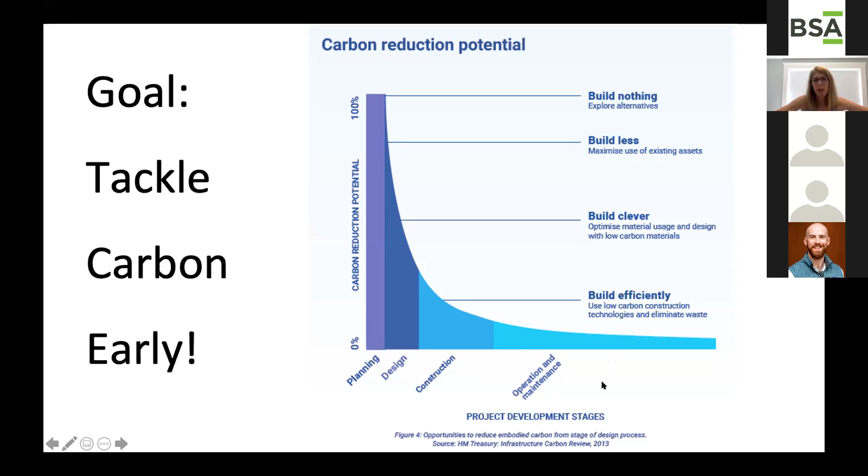The Carbon Leadership Forum is really an amazing repository of information for everyone, from the novice on the topic to those who are looking for data sets to assess their own work.

To optimize the project, there's a lot the design team can do here. You have a new building versus a retrofit, a smaller footprint, program efficiency, designing spaces that can be used for multiple purposes instead of designing more square footage for unique spaces.

When we get into the optimized system, this is where I think those who are involved in procurement, especially for new construction and renovation projects, really can have a hand in the matter. That's where we start thinking about alternate materials. Builders are experts in materials, and because you install them and have to deconstruct and reinstall, you have access to a lot of information.

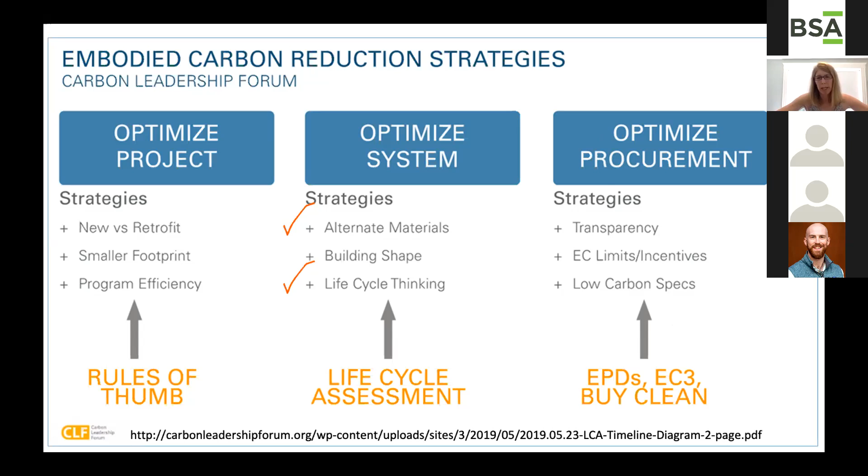And finally, we have optimized procurement. This is something that I think all of our speakers, but especially Stacy, will be delving into deeply, so I'm not going to say anything more.

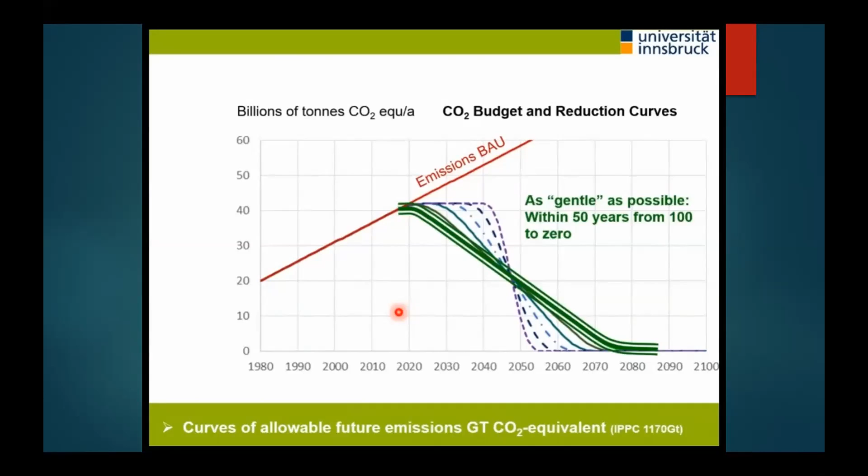The second graphic here shows the business as usual, so the BAU versus the glide path scenario, if you will. You can see in this space of complacency, there is a lot of work to be done to bring things down to where we need to be.

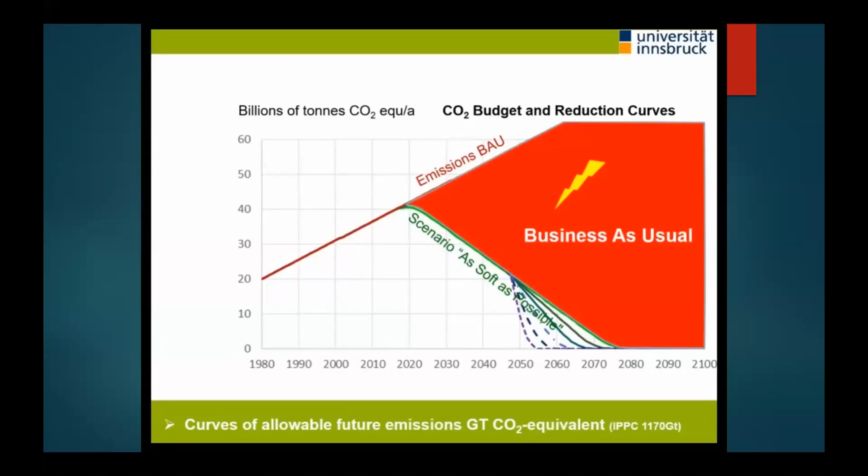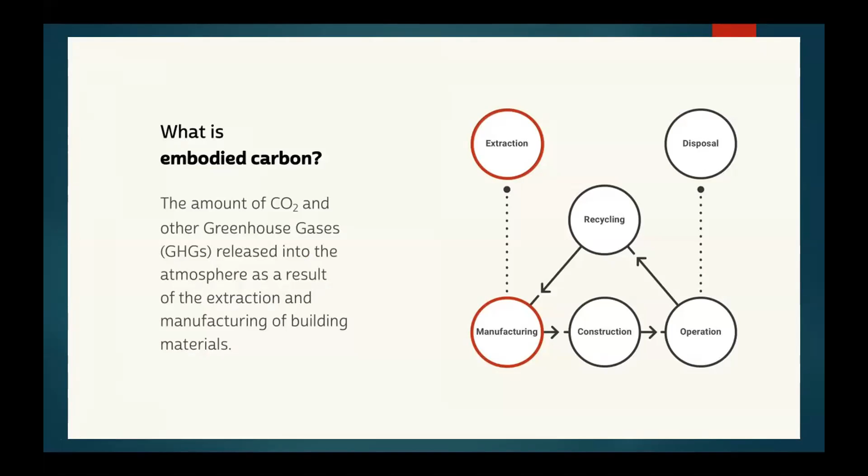Straight away, I would like to underscore the importance of the role recycling and waste reduction plays in the carbon cycle. Very important. It can function to keep embodied carbon in service use, avoiding disposal where the carbon is ultimately released.

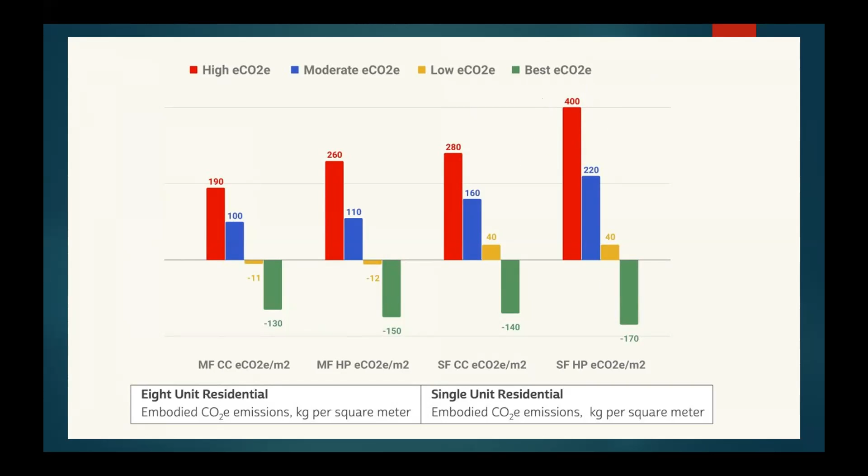So how do we procure? Big question. And while I certainly don't have all the answers, I have a lot to learn and understand. Hopefully I can impart a few helpful points to move forward with: transition from business as usual to the best of your ability, and find ways to continue to improve over time.

This is not an easy task. We've found that we really need to motivate ourselves and each other in the absence of energy and building codes that do not adequately account for upfront carbon values. While incremental improvements are certainly being made, I believe the onus is upon industry leaders to engage a targeted process to integrate embodied carbon specifications into our projects ahead of those future improved energy and building codes.

And in such a way that we create a market with more available low carbon materials. Understanding the need to transition embodied carbon awareness and accounting from a concept or an ideal to an actual practice is critically important.

An example of something we can do to get started right now without calculating anything is to touch back with recycling and reduction of waste, substitute plant-based materials for synthetics, use FSC wood products, reduce building size, and one that I believe is a great starter is to get into the habit of obtaining EPDs, environmental product declaration documents, for all the products you use. If you have favorite materials that don't have an EPD, contact your manufacturers or providers to get those documents so we can amass our database with this information.

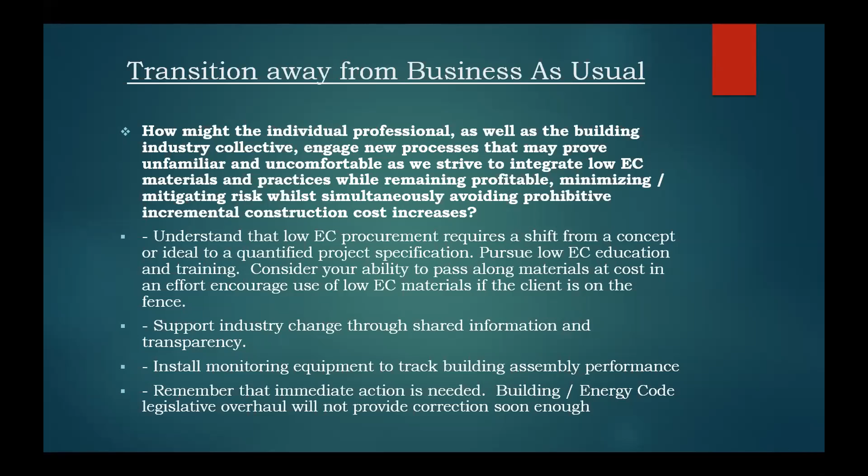Integrated design and development is an invaluable approach toward low embodied carbon construction success, and it's always better to have folks involved from the beginning for obvious reasons. But how we achieve our energy goals matters. It really does. A continued focus on operational energy is required, but we'll be missing a meaningful opportunity if we do not bring upfront carbon accounting and drawdown goals into our design and construction approaches.

Integrated design really enhances clarity and understanding, which inputs directly to project efficiency and cost containment. For example, it is very easy in high performance to oversize space conditioning and ventilation, and very easy to make subcontractors intimidated with new methodologies they're not used to. When you have intimidation or a lack of understanding, you have a perceived liability, and when you have perceived liability, you get elevated bids.

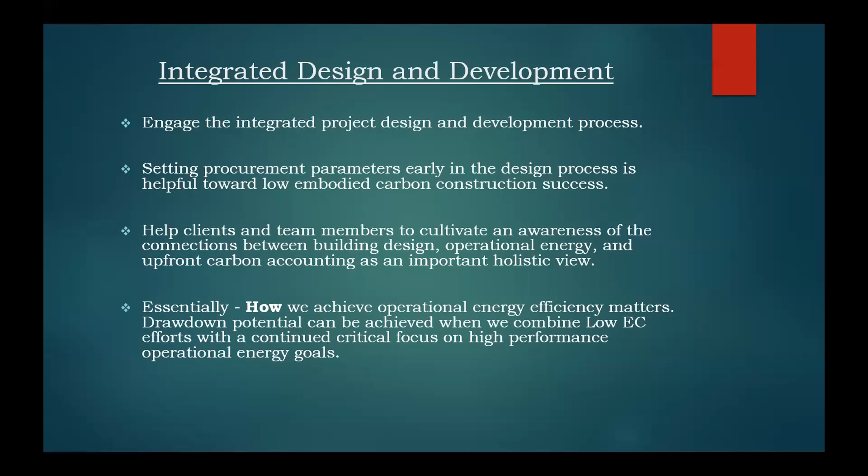So I really believe the extra upfront work in integrated design and development will pay dividends in making these projects possible down the road at affordable cost. Set up achievable goals early to promote this transition away from business as usual - it's a huge step in the right direction. Here are a few prompts to consider. In the interest of time, I'm not going to go through them all, but you can always refer back to this if you're so inclined.

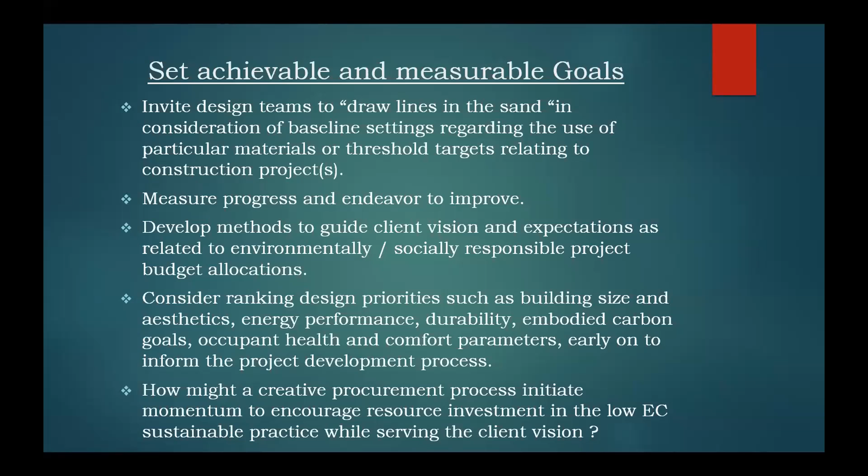While there are many ways to approach and present this, I'd like to underscore the importance of unpacking and truly understanding the actual value-to-cost ratio when comparing these assemblies. We've also found that if you break it down that far and it's all out on the table, it's a great segue to have those meaningful education discussions and debates towards figuring out what is what and why. So many times the important part is why, and once people understand, they're more inclined to move forward doing those right things.

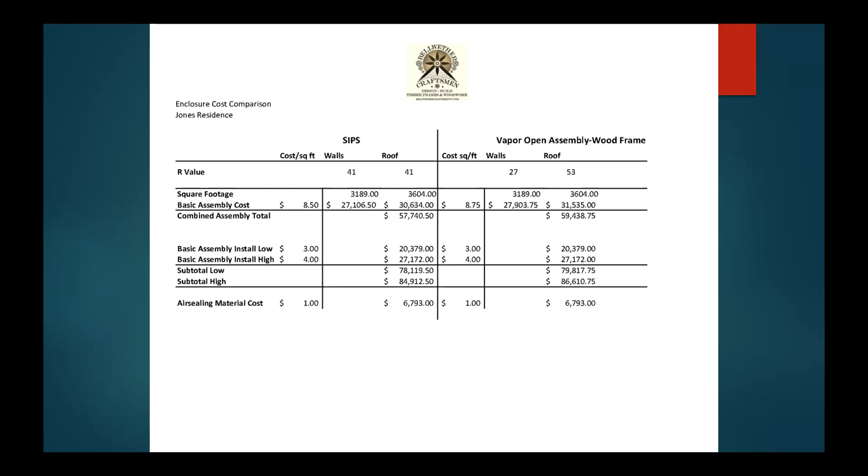Here we can see a cost analysis of that project, and you can see that we were very close. You can also recognize the helpfulness of breaking out that cold roof assembly so we didn't confuse things. Often SIPs come with a non-vented roof, but a vapor-open assembly really needs a vented roof. So when comparing those basic assemblies, breaking that down into its very basic terms was helpful.

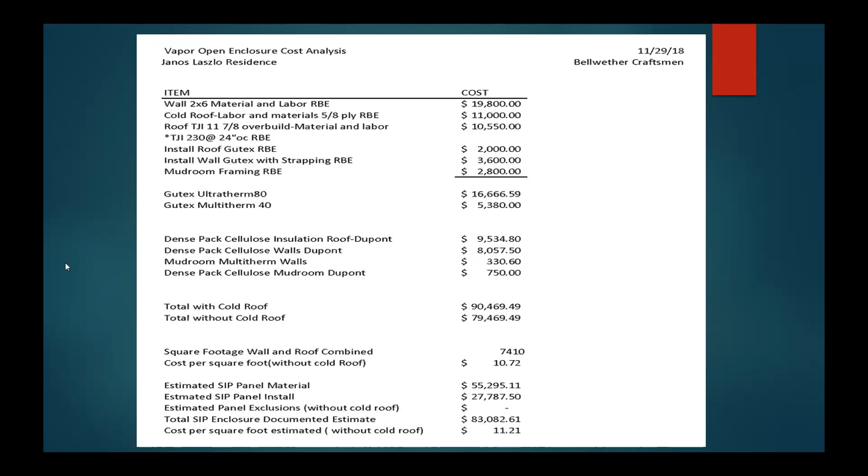The other Janos project shows that as well. Here we have the top five materials you can get started with: FSC certified wood—not all wood is the same, and that is very true—natural building materials, cellulose insulation, cross-laminated timbers, and wood fiber insulation. All great things to use.

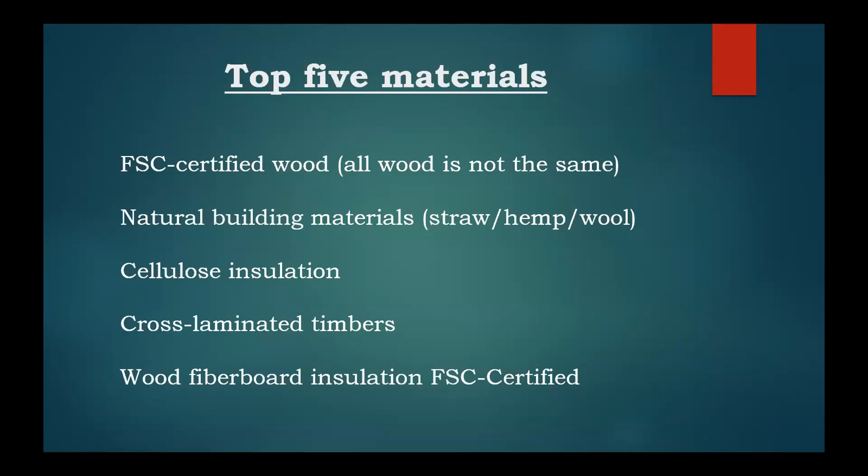Things to de-emphasize or avoid if you can, or at least keep in perspective at a minimum: aluminum, concrete, steel, refrigerants, and spray foam.

Okay, so I think we're done. Brian's done, and I think now we're going to pass the torch. Brian, were you going to share any of your project slides, or wait until later? Whoop, I cut out a little bit there, apologies. How were you on time? I didn't—you have about a minute, so if you wanted to share some photos, but probably not all of them. They'll be available for people to review if they'd like, and we can just move on. That'd be fine. All right, okay, super, thanks. All right, so, Michael. Hopefully this is all good. Here we go.

Hello everyone, my name is Michael Orbank. I'm an assistant project manager and also sustainability lead at Commodore Builders, a mid-sized construction management firm in Waltham, just outside of Boston. I'm coming to you today to talk about procurement, because it's really what CMs do best.

It really engulfs nearly everything we do. I'll also talk about how Commodore is starting to really think about sustainability and embodied carbon in how we're doing procurement. As stated here, procurement is the bread and butter of most of a CM's work.

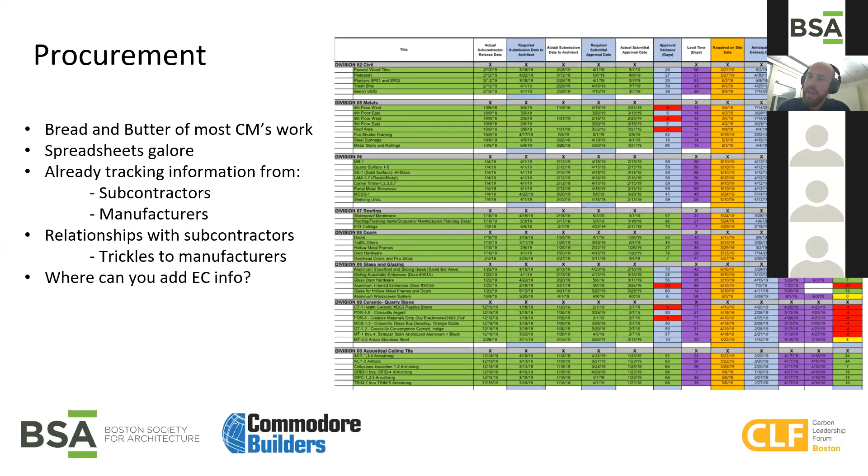As you can clearly see with the many headings, it wouldn't be that much more difficult to add these in. So one thing I've learned in my crusade to add sustainability, to promote reductions in embodied carbon, is realizing that you just have to ask questions. It seems so simple to hear me say that, but it goes a really long way.

Without asking questions, I would have never realized that on multiple projects I've been on myself, owners are starting to prioritize sustainability. And many CMs don't know that if it's not specifically listed in the specifications or when we're bidding in the RFP, it is there. More large companies, more smaller companies, across the gamut—institutional, life sciences—it's becoming a priority to them.

So asking the questions early, as Brian had mentioned and as Lisa had said, is sustainability important? What are your goals? And then once we're on the project, understanding the specified materials. CMs do this all the time, making these procurement logs and really understanding and biting into the project. We have to understand what exactly is specified, and just have something in your mind to know, okay, what can be done differently?

Bring up the conversation early, making sure that everyone knows your goals sooner rather than later, because that's when you can make the most amount of impact.

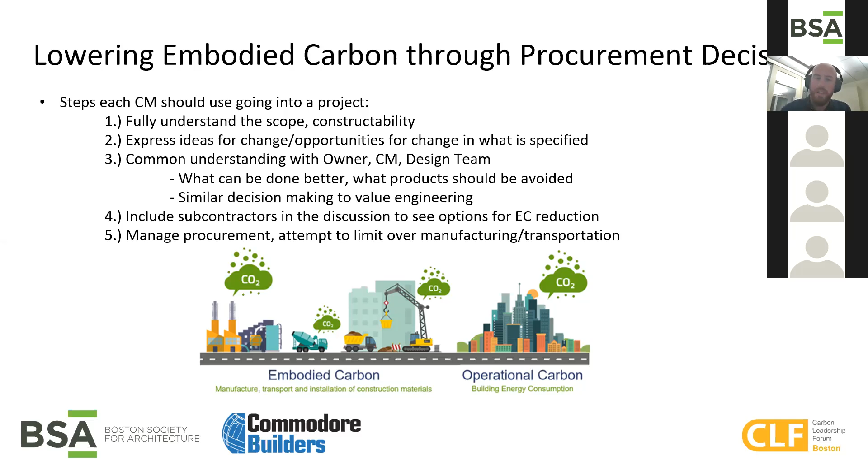For my last slide, just knowing that you have to prioritize sustainability and really be an advocate. I've been told, hey, it really shines in how you speak and present yourself with lowering embodied carbon and making it a priority. But I feel like everyone can do that. It's really knowing there are alternatives, that you need to ask questions, and that everyone from CMs to designers can learn how the industry and its products are changing, sharing and asking questions, being part of the discussion no matter how small, and keeping up with the changes, because different products are constantly coming out in this industry.

Two case studies, one of which was a Cambridge biotech company. Commodore has a carpentry division that installs most of our studs and drywall. I asked a question in the middle of an OAC meeting once: hey, there's a recent product I saw at Greenbuild, the USG EcoSmart gypsum wallboard—can we use this? The senior project manager working at the time liked the idea, and the owner liked the idea. I went to the supplier over in Waltham, and the entire scope of this 20,000-square-foot lab reno to replace all the gypsum wallboard with USG EcoSmart would only be about $200 more for the entire scope. The only reason it was more expensive is because the supplier had the product but had never sold it before, since there hadn't been any interest in it. They were hedging their bets. So in requesting this for an entire project worth of material, we were able to get it in.

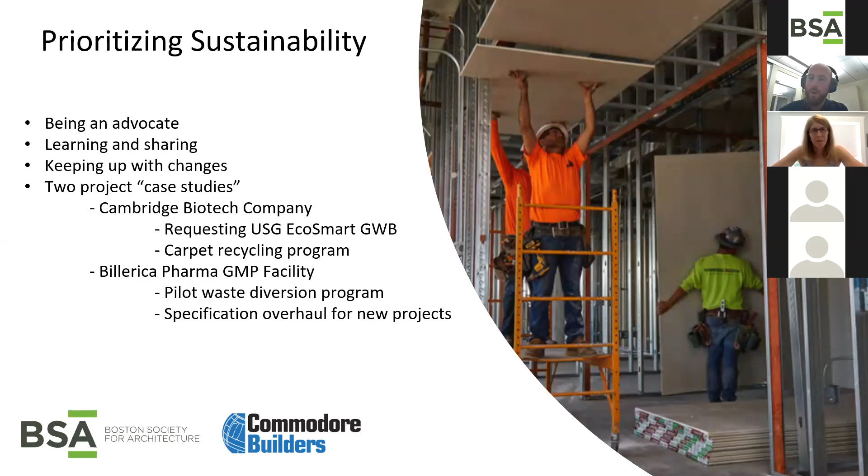All right, I'm going to pick up where we left off and walk through how Skanska looks at this from a contractor perspective when it comes to our responsibility and role in embodied carbon reduction, as well as how Building Transparency is supporting our pilot users and larger user base as they start to do this themselves.

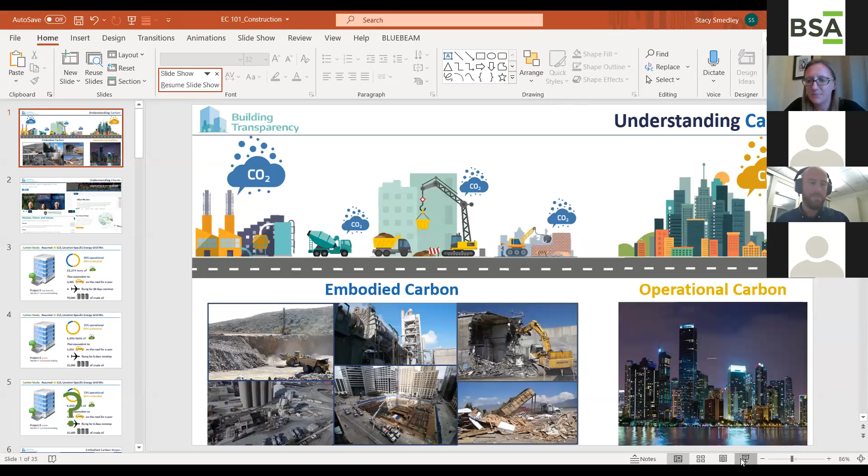I think the first thing we all have to do is understand carbon and where we can make the most impact in our role in the AEC industry. This is a slide I like to use because visualizing where carbon is coming from is helpful. Operational carbon is energy consumption of buildings, while embodied carbon covers all the things the construction industry and contractors touch during the course of building a project. Because of that, it's imperative that contractors are part of the conversation, since they're the ones procuring all the materials that have these emissions impacts.

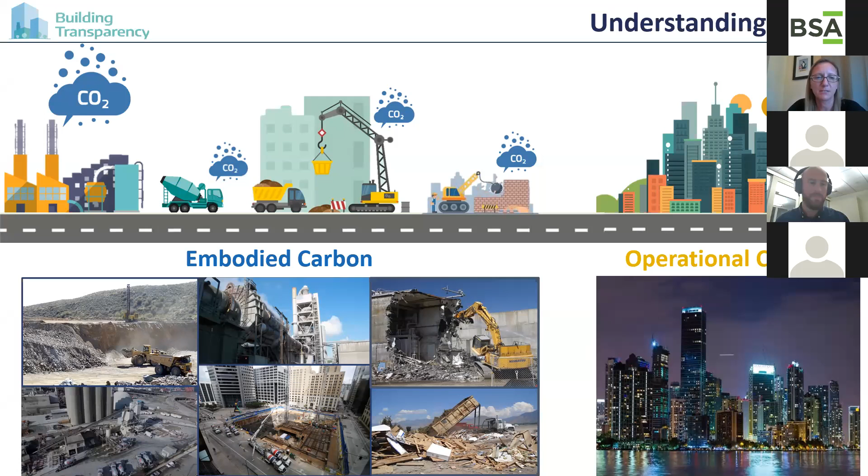The way we see this starting is at procurement, and doing it well starts at the very beginning of the job, when you understand your client's perspective on carbon so you can support them in the decision-making process. This gives you the levers and tools you need as a procurer of materials to look at lower embodied carbon options and to specify and procure them. So you have a client, a potential project, and you understand their carbon reduction targets so you can speak in their language when you show them embodied carbon impacts. It's really helpful to have that lens.

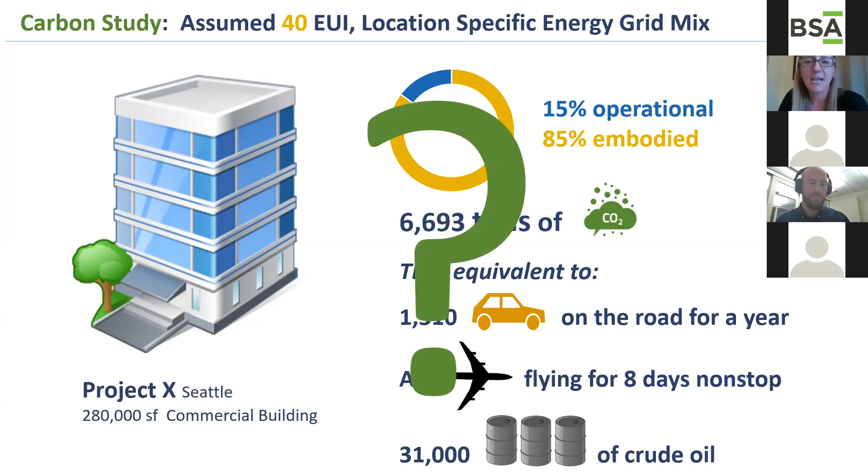As an interesting nuance, if I take this same building and put it in Seattle, because of our energy grid here, most emissions shift to the embodied carbon side since we have hydroelectricity and a clean grid. For projects in Seattle, actually 85% of the emissions of a project through 2050 - in this case, a commercial office building - are in the embodied carbon bucket. So if we aren't talking about and thinking about this, owners with carbon reduction goals who aren't looking at it get an eye-opener when they see where the impacts really are. That's when they ask, okay, you've shown us there's an impact, what do we do about it?

The contractor's role, when you look at the stages of embodied carbon, breaks into three stages. There's upfront carbon - the product and construction process, everything associated with manufacturing and installing those products. There's the use stage, which is how many times you're replacing a product over a building's life cycle. And then there's the end of life stage. From a construction procurement perspective, what we're touching is really the upfront carbon and end of life carbon. Our approach to the end of life stage is really for the project we might be tearing down to build the new one.

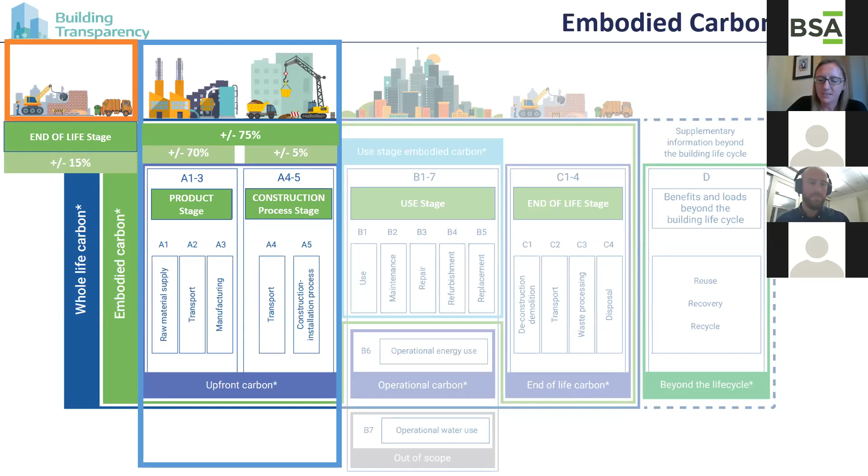So we pull that up front, ahead of upfront carbon, so that we're looking at the building we're demolishing right now, not the one we may demolish in 30 or 50 years. What you're seeing here are percentages I've thrown on, showing the scale of impact of each category, if you're taking 100% across all three.

Just another slide on this. This is a study of a project put into Tally, where we took all the stages and removed the end of life and use stage. So what you're seeing here is the comparative impact for this one project of the use and end of life stage to that upfront product stage.

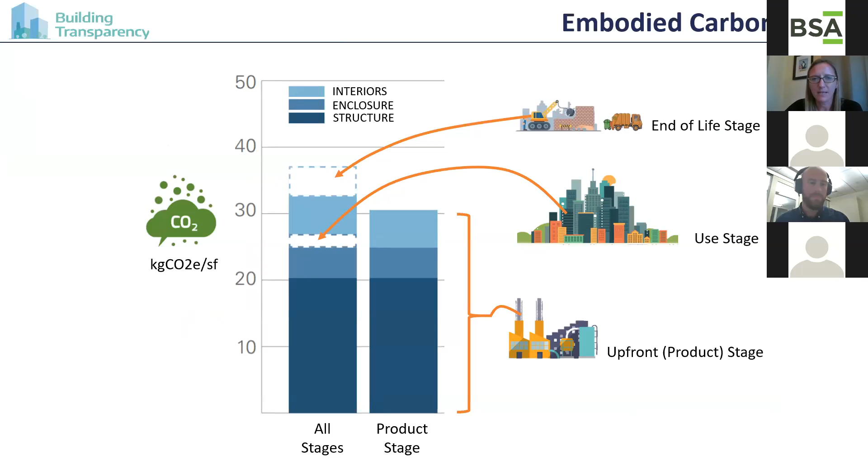There's a particular reason why we are focusing and very urgently attacking this upfront product stage, because it is such a large piece of the overall. The other two are important because as this product stage gets smaller, the other two stages, of course, become a larger piece of the puzzle.

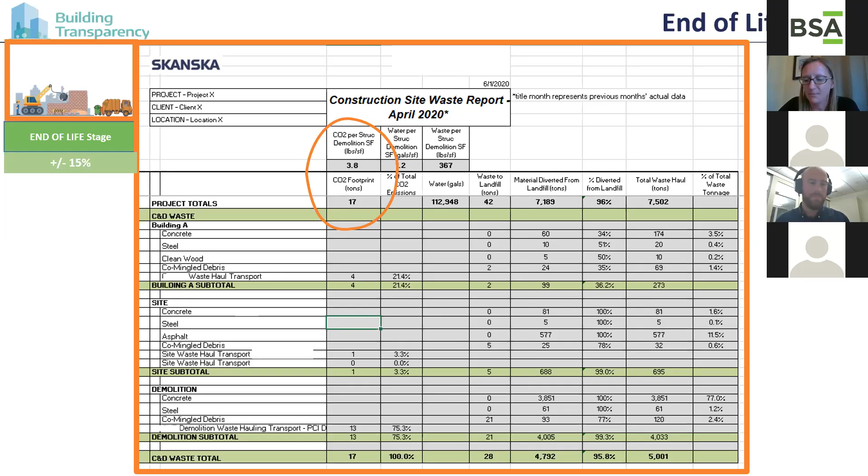Very briefly, on end of life, we do track this on some projects. This is an example of a spreadsheet where, by doing this on enough projects and tracking all the impacts on waste, we're getting to the point of a pound of CO2 per square foot metric. We can start to forecast what we may have in terms of embodied carbon emissions of the waste stream. We also try to do as much as we can to reuse materials.

This goes back into the circular economy, but even on a smaller scale, if we are demolishing a sidewalk, we were able to give this to an urban food forest to use as their retaining walls. So there are always opportunities, similar to the carpet story, to really think about this.

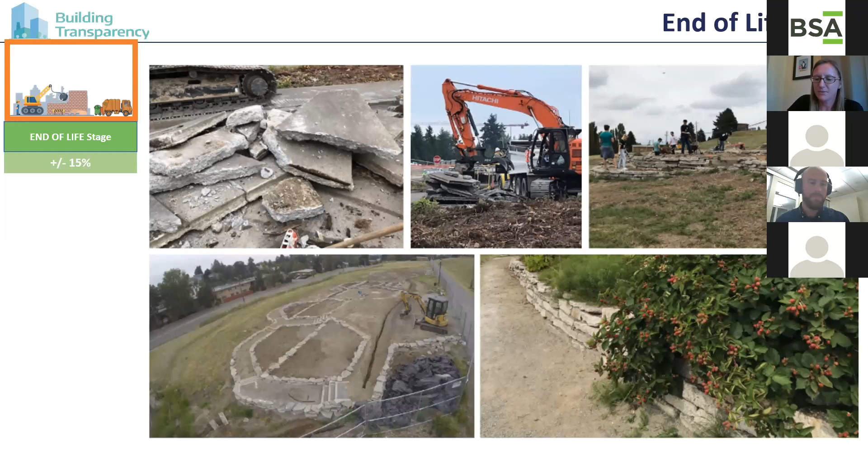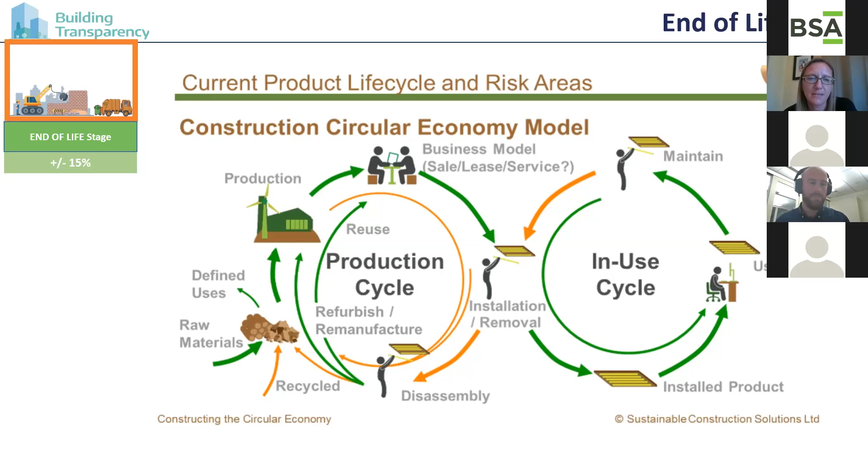The reason this is important is because it's not only affecting end of life emissions, but the more we use recycled products and recycle things back into new products, the more we reduce those upfront emissions too, because we're not starting with virgin materials, we're starting with reused materials. So that manufacturing and extraction emission bucket starts to go down. It is very circular.

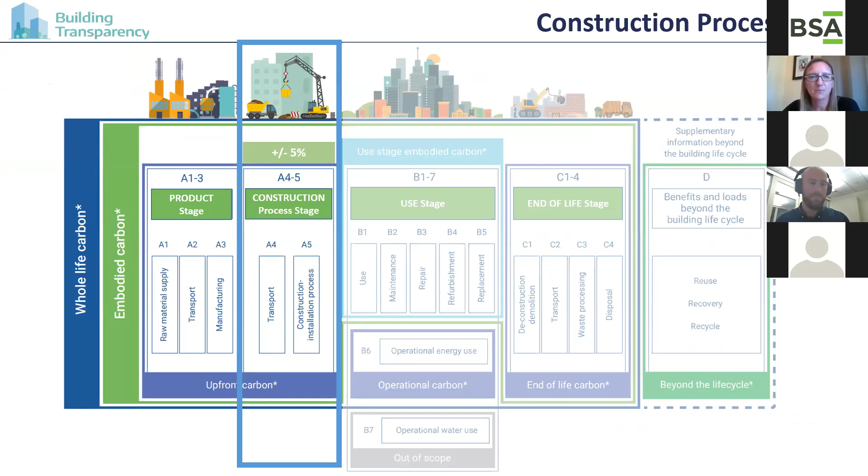Watching my time. The construction process stage, we also look at this, even though it's a very small piece of the pie right now. Again, the reason why is because we want to start to be able to forecast what could happen on projects.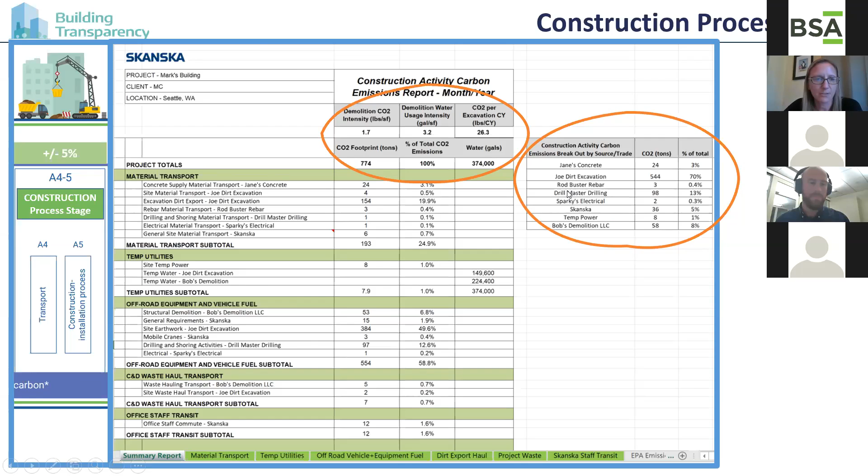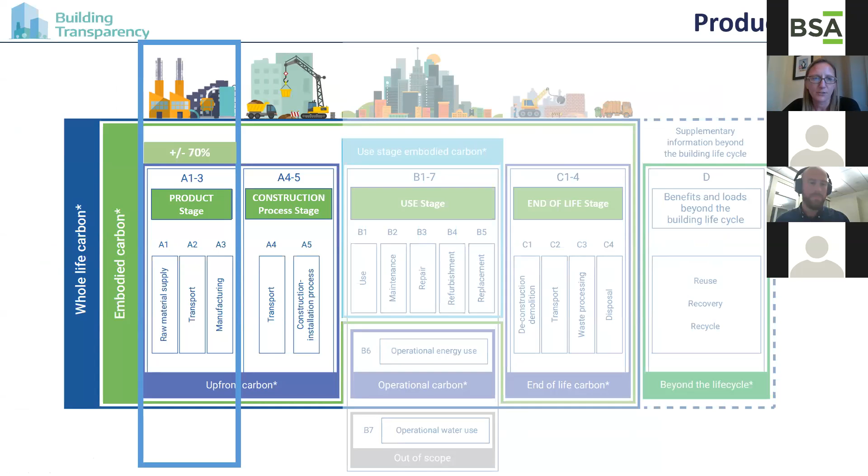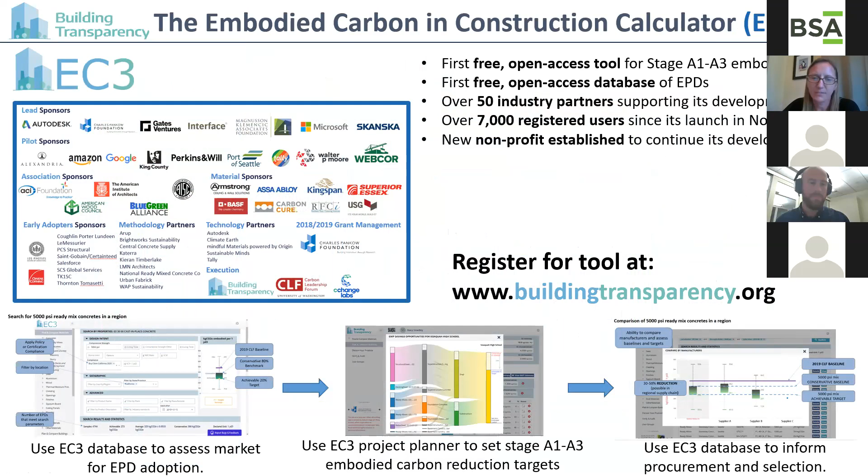But really where our focus has been, and where Building Transparency's focus is with the EC3 tool, is on this upfront product stage, A1 to A3, where the largest scale of impact lives in a procurement model. So I'm going to walk through how we've seen pilot users engage in this process and really utilize EC3 for specifications and procurement. If you have not registered for it, it is free and open access. You can go to buildingtransparency.org, register for free, and get access pretty immediately to the tool to do what I'm going to do right now.

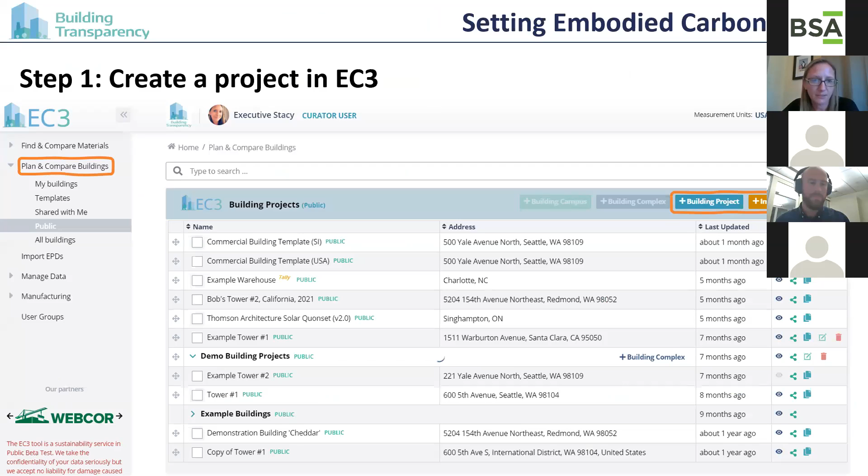What we do, and what we have our pilot partners do, is actually start by creating a project in EC3. This is really step one. This is where you can take imports from BIM 360, from Tally if you're doing lifecycle assessment early, or from construction estimates, and start a project.

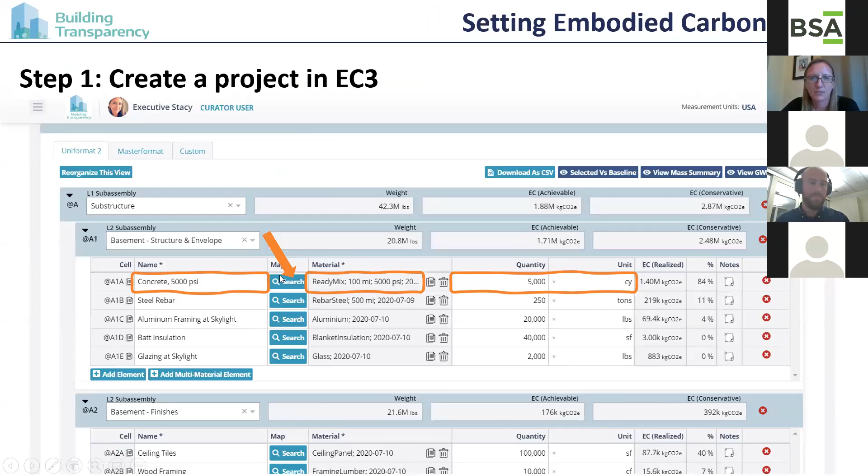You're able to actually put in your line items of your estimates or materials. So this is looking at how you have the description, the quantity, and then you click search. That search allows you to search for what you know about that product at this stage, typically in design development. You click the search button and you get a sample of the EPDs that are resulting from your search.

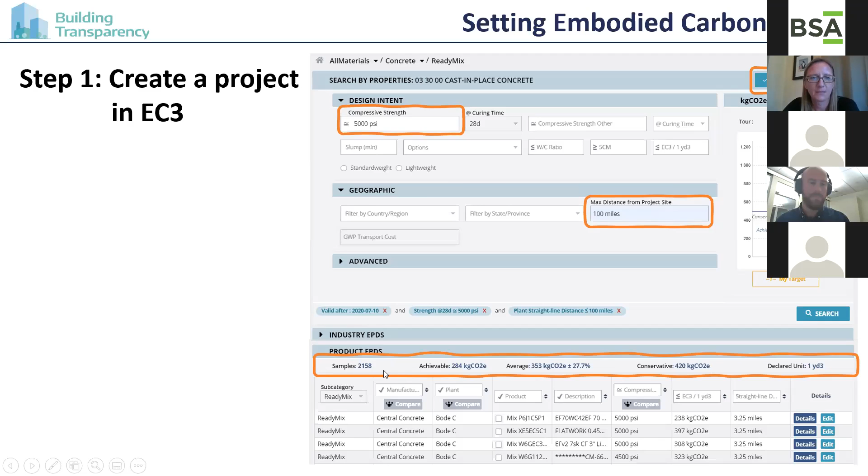In this case, because this project's in the Pacific Northwest, we got a good sample, and we're using that collection to give us basically a range. We're not actually selecting a product yet, but we're saying, okay, there's the baseline that's been established. Here are where all the EPDs are falling in this little green rectangle—this is 60% of all the returned EPDs. We take a conservative and an achievable number at the 80th and 20th percentile.

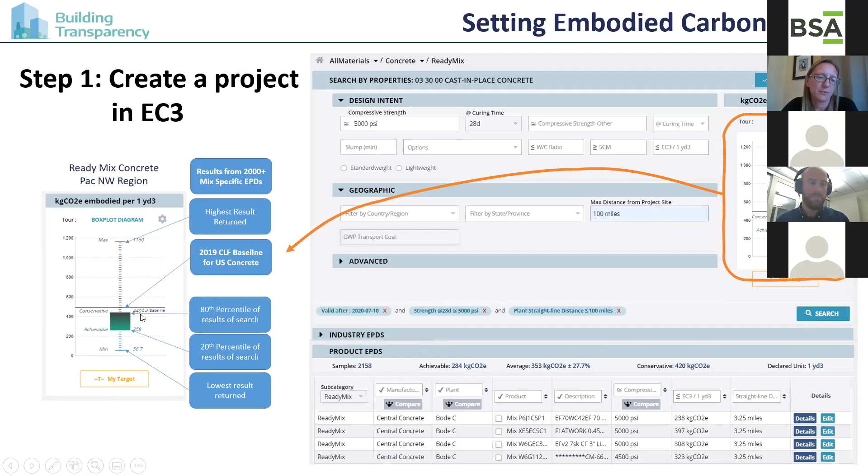And what that does is start to do things for you. It does all the math of the quantities times the carbon emissions of your searches to give you, for your project, a conservative and achievable target.

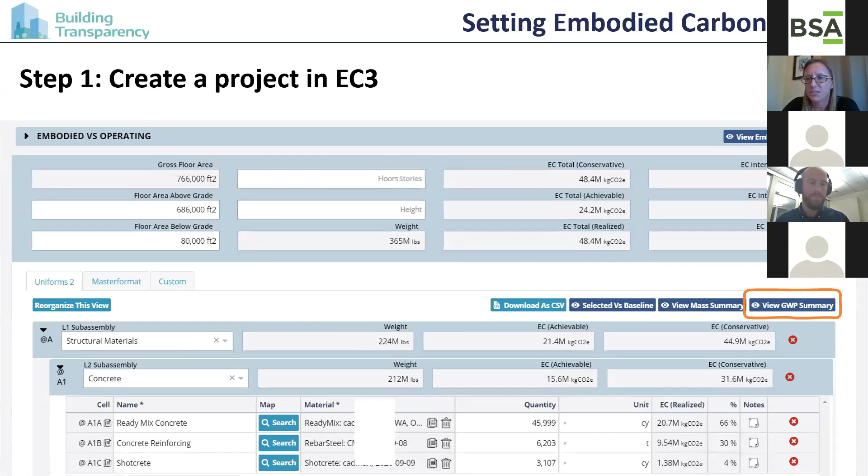If you click on this little GWP summary button, it's going to pull up a diagram that, based on your quantities and your searches, gives you the relative scale of impact of each material in your project, as well as that reduction potential against the baseline. This is looking at how much you could actually reduce based on the current EPDs in the database that are real products. This rolls up to an actual project level reduction.

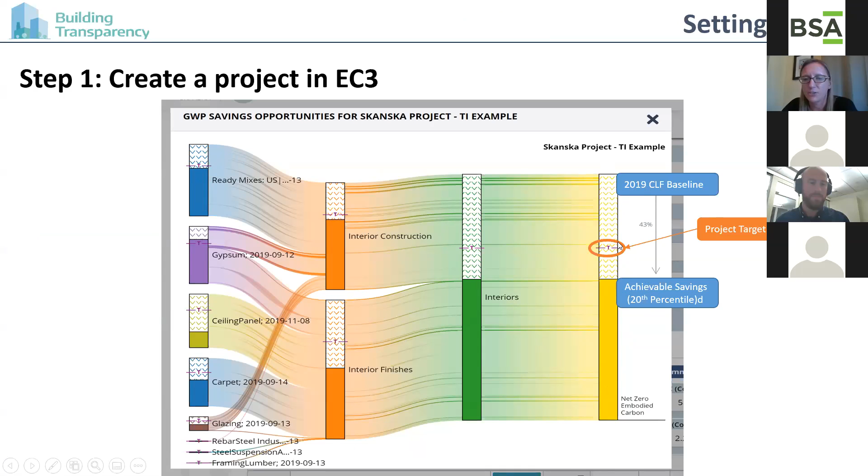This is taking that 20th percentile, so there's still 20% of products below — we're not taking the lowest. And it's giving you a chance to set a target, or have a client begin to set targets, and allow you to actually optimize the project to achieve a reduction, not just track.

Step 2 is really to see if your preferred typical suppliers have EPDs. We need environmental product declarations to be able to procure smartly around carbon. So the first thing you can do in EC3 is go to find and compare materials. I'm looking at rebar — I've clicked down on the rebar button, and you can do a search.

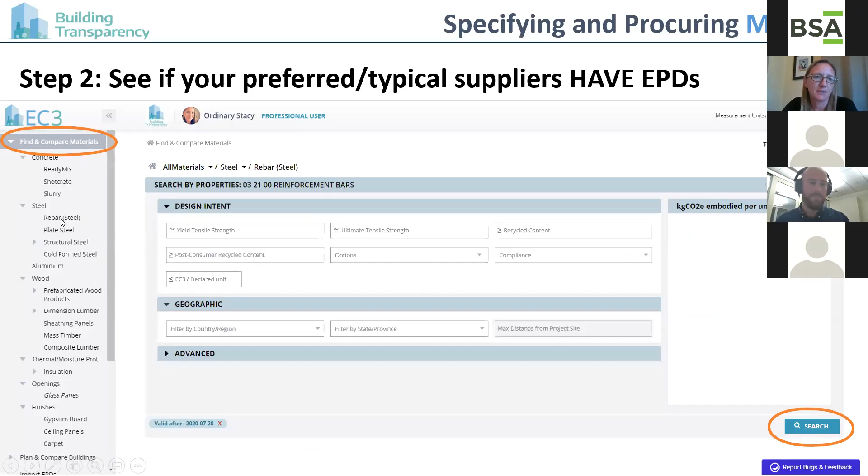I'll go into the tool in a second if we have time, but if the search results in nothing — part of step 2 is asking for EPDs.

So on the Building Transparency website, you can actually click on EC3 and documents and get to templated EPD request letters. This is very important — we all need to be doing this. We are seeing just by asking that manufacturers are getting on board, and the more times they get the same ask, the more incentivized they are to do so. So please go to the website, download the template, and begin to request EPDs if they're not in the database.

The second thing is if you do have EPDs returned, use them. So this is where I've done my search — it's given me my samples, I've clicked them to compare. I'm seeing my 6 rebar suppliers that are in Washington. I can see that they're all really good because we're all on the good electric grid and using a lot of recycled content, but Nucor actually is the best. So can I start to look at my procurement and my specs to either have a basis of design supplier for rebar, or can I start to set limits or reductions based on this data?

So this is an example of a template that is in development for specifications, where it would have template language that could apply to any material and allow you to start to do things like set a basis of design and a declared product.

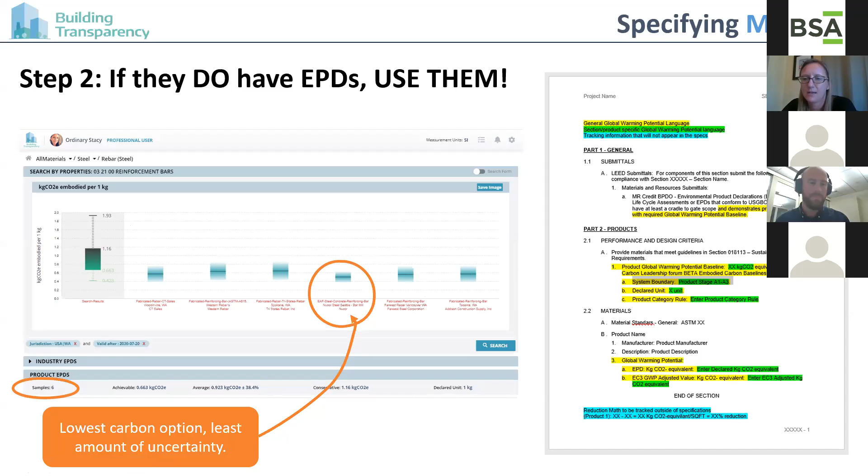Step 3 is don't forget the bid documents. It's great if you get things in specifications during design because that helps the contractor have leverage when they're doing bidding. But it's also very important that there's language in that bid document that the supplier is going to read and act on. This is, again, available on the Building Transparency website.

This is some actual template language for bid documents. The approach that's been successful is just asking: do you have an EPD? Yes, no. Would you invest in getting an EPD? Yes, no. Would you charge the project for that investment? Again, just another lever where we're including this language in all of our bidding.

And the last step is really using the data we get back for decision making. So this is where we actually did performance-based concrete specifications. We requested EPDs because we knew that we had 2 suppliers in the database for Washington that could actually provide EPDs for concrete mixes. We used that information for those representative mixes to get to reductions against the baseline and against the industry average.

So the case here was supplier A, the lowest carbon supplier, was also the lowest cost. We were able to achieve this reduction just by the fact that we asked and could actually assess it next to cost, and they knew we were being competitive about it.

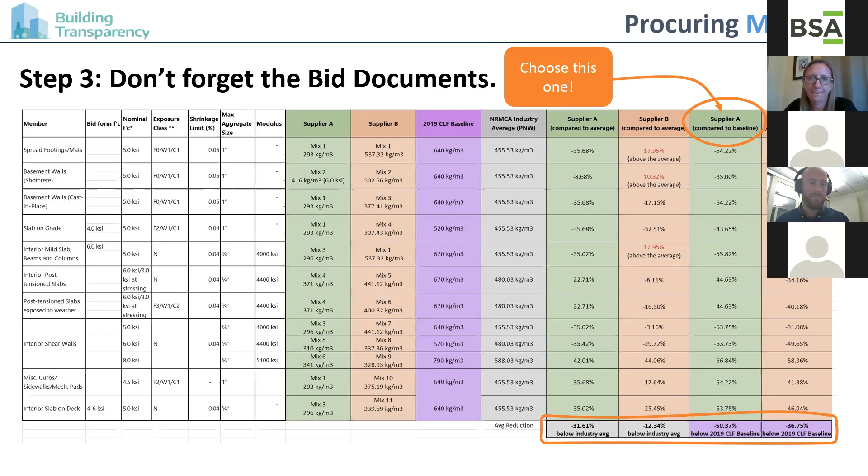The last thing is once you've actually confirmed your installed products, you can go back into your project in EC3, click the search button again, and actually go select the EPD used.

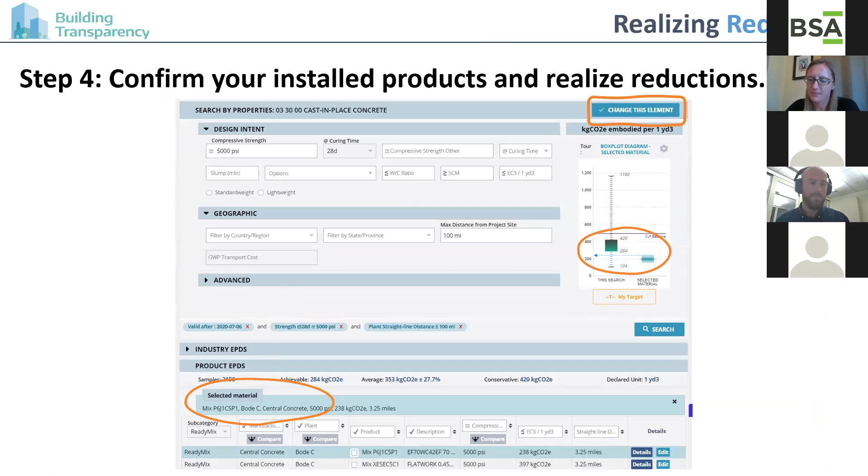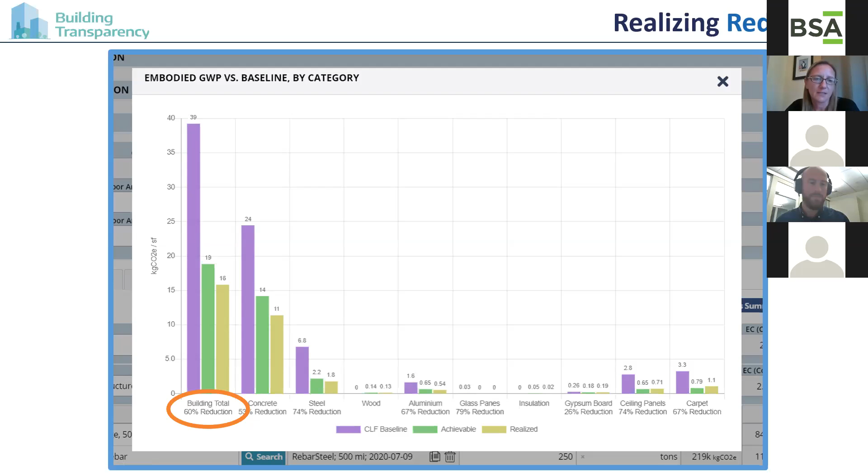So for each of your line items of material quantities, you can select the actual procured material with the attached EPD. What that's going to do is allow you to look at what you've selected versus the baseline. This is really what we want everyone to be able to do at the end of the day: not just forecast how we could make these things better, but what did we actually achieve? We see that really through environmental product declarations, just like we look at toxicity and other things for LEED. If we can get submittals with EPDs and really account for our savings, we're going to move the market. This really gets into how this all works together.

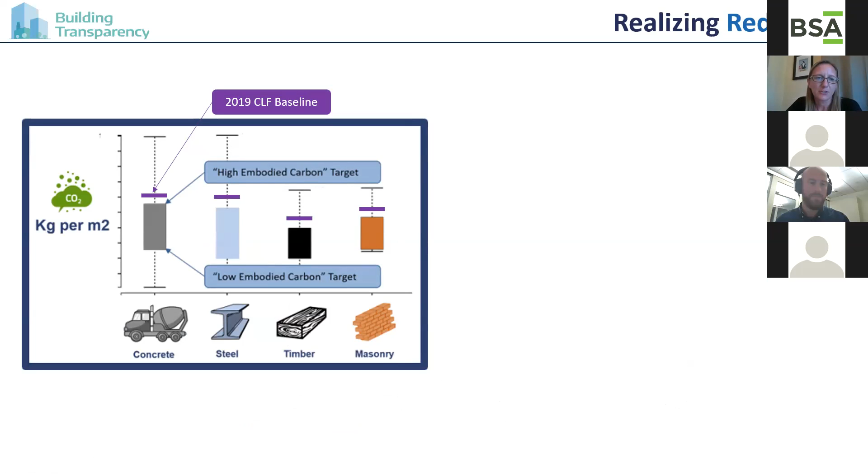Just like circular economy, when you reuse materials, you are reducing those upfront emissions by not starting from scratch and extracting and manufacturing new stuff. As we start to procure and incentivize procurement of low carbon materials, all of these manufacturers are going to compete. They're going to create lower carbon products that move the baseline down and move everything closer to zero. Think about this just like operational energy: as we get better, optimize efficiencies and find better performing products, we can reduce that baseline and get closer to zero and hopefully meet our targets.

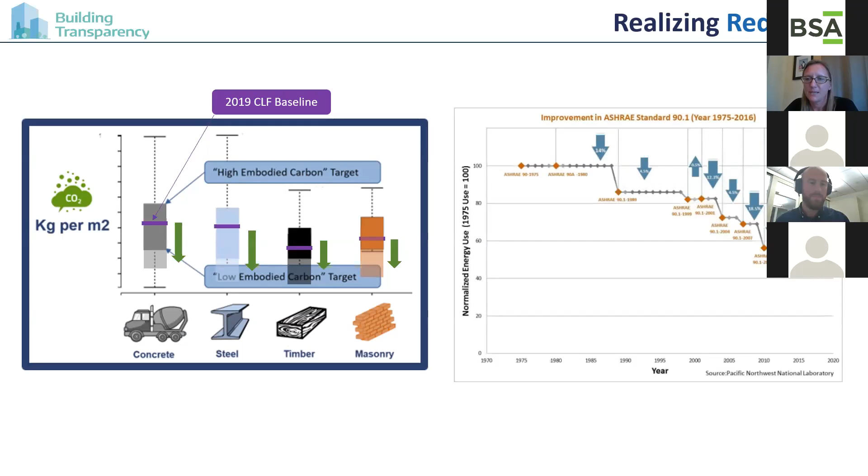Awesome, thank you, everyone. We have a few questions, so I will try to move through them.

Chen Quinn asks, could you share impact on the project schedule of starting the discussion on sustainability goals and embodied carbon early in the process? And then we had a related question about whether the recommendation would be to bring the CM on board during schematic design. What are the benefits of having the CM so early? So Michael, why don't we start with you, and then each one of you can possibly add to this.

Sure. So the earlier you bring us on, the easier it is. It makes our lives a lot easier when we're going through this, even from just a constructability standpoint, or basically if we're not doing anything with embodied carbon or sustainability. But bringing us in early and really working through, especially with schedule, the earlier the better. With the biotech firm in Cambridge, this was addressed in the first OAC meeting, and we were able to fit the schedule around that. The later you go, the much harder it gets. I imagine any CM can say this about trying to change the schedule. So if it's early enough, it won't change the schedule at all.

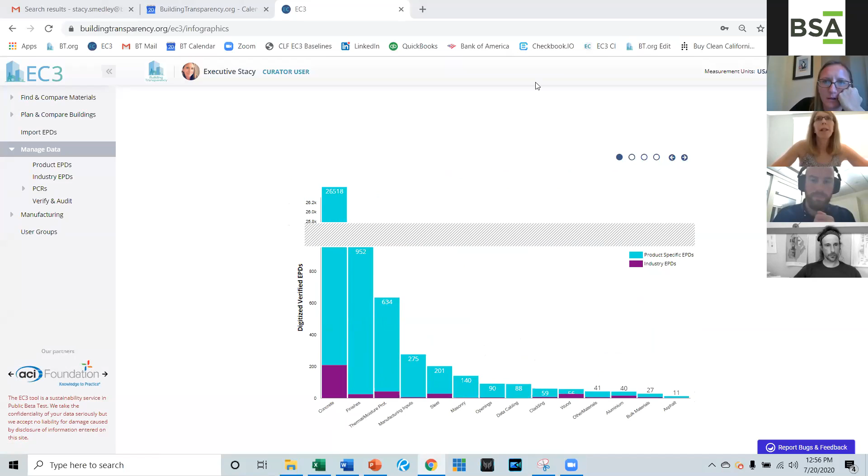Stacy, there's time if you want to show the slide that some people are referring to in the chat. Sure, yeah, so hopefully you can see this now. Can everyone else see it? I'm stuck. I can see it, yes.

Okay yes, this is just when you're on the landing page of EC3, what shows up is this graph, which is all the EPDs we currently have, and it's dynamic, so it constantly aggregates more and more as we get them. This is my curator view, so you're seeing all the categories that aren't published publicly alongside the public ones. This is really what the database looks like right now.

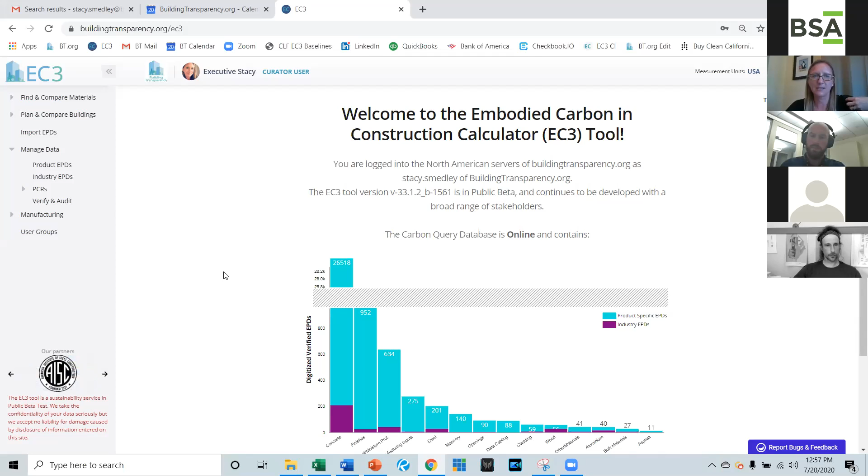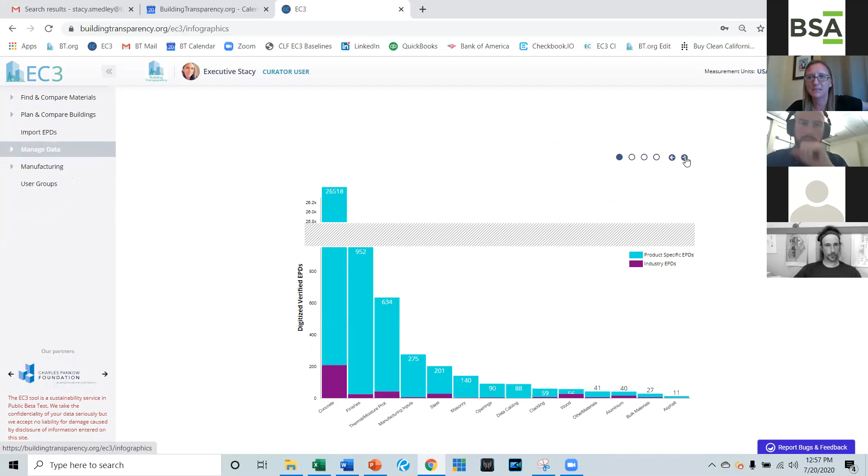If you click on Manage Data on the left-hand side, we've added some more graphs in. This is where I was talking about it but you couldn't see it. So there's the first one, just number of EPDs per category. Then there's plants and manufacturers per category, so you can see how many actual manufacturers we have for each of these things and how many plants they're reporting, and how many EPDs we have per country. The darker the color, the more we have.